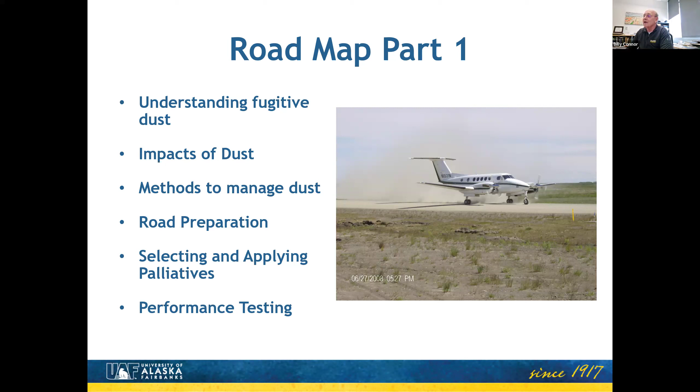The dust is coming off of our roadways, and in this case, the photo airports, the impacts of those dust, how they affect our daily lives, how we manage our roads in order to minimize the dust, as well as selecting the right palliatives and how we apply them, and then talk a little bit about some of the tests that we have available to test the performance of our palliatives before we even put them on the roadway, so that you can get an idea of some of the resources that are available to you.

Right now, throughout the U.S., there's 1.3 million miles of unpaved road. 97%, as you might guess, are in the rural areas. And the data that we've collected over the years indicate that there's about 10.5 million tons of particulate matter, PM10, as we know it, to 10 micron size, being put into the air on an annual basis. So that's a lot of material that's kind of floating around in our air and impacting our daily lives.

To bring it home a little bit, consider a 2-mile unpaved road, which is not uncommon for many of our communities around the state. 20 vehicles a day at an average speed of 30 miles an hour. If we do that, we're putting about 5 tons of dust per month into the air, and that's getting into our lungs, getting into our houses, and just wreaking a bit of havoc. So that kind of gives you the magnitude of that, and the photo that you see there kind of gives you a sense of it.

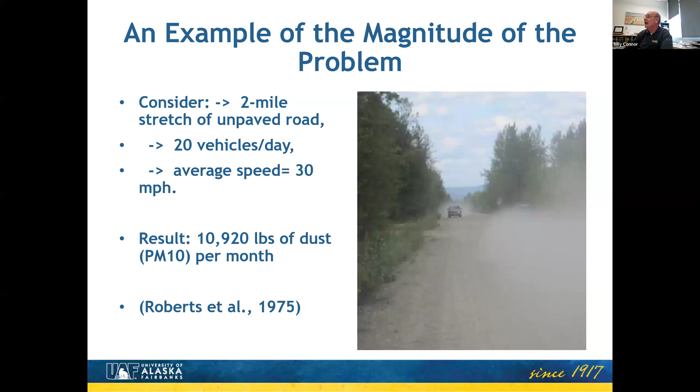It's interesting to note that an ATV puts about the same amount of dust as that pickup that's coming at us or going away from us each time. We'll see some photos of that, but just kind of think of an ATV instead of a pickup there, and you'll see about the same amount of dust being thrown into the air.

It does have an impact: degradation of the road surface, and we'll talk a little bit about how that manifests. Driver safety, primarily due to the washboarding and to the visibility, and then the health and quality of our life, and especially the elderly and the young are really affected by that quite a bit. Just to make sure we're all speaking the same language in all of this, I'll give you some definitions, and we'll give you a few more as we go along.

The surface course is the top layer of the road that is being driven on. And that can be anywhere from silt. Some of you have dirt roads out there, all the way to gravel roads, chip seals, and even pavement. So the surface is what's on top, basically.

Aggregate is a mixture of rock and sands and silts that make up the road surface. Fines, that's that fine material that makes up the dust, if you will. And we actually can use that to our advantage, and we'll talk about that a little bit in there.

Plasticity, that's kind of what makes everything stick together in there. Most time we think about clay, but even some of the silts have a stickiness to it, if you will, and we call that the plasticity of the soil. And we actually want some of that in our soils to make it dust free.

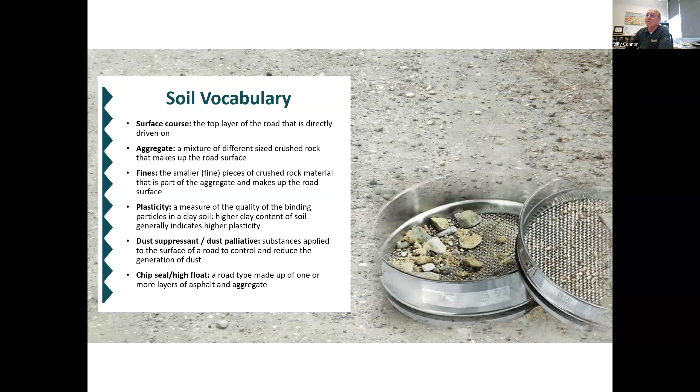A dust suppressant or dust palliative, we use those interchangeably, is the substances that we apply to our surface to reduce the dust, the generation of dust. And then chip seals or high floats, that's a type of road that's made up of one or more layers of asphalt and aggregate. And of course, we all know what a hot mix pavement is, and we'll talk about chip seals and high floats and those types of materials in part two.

Okay, a few more definitions. Loftable material, that's material that can be placed in the air due to wind or vehicles going by. That's usually the 0.75 mm material and finer. And you can see that in the photo off the Dalton Highway here. As a vehicle, actually there's two vehicles going by there. If you look carefully, you'll see a bus going north. But at any rate, we can see that.

Suspended material is one that stays in the air for an extended period of time, and that's usually the PM30 and smaller. The smaller it gets, the longer it stays in the air, and we'll talk about that. And then those materials that are harmful to the health, those are smaller than PM10. Sometimes you hear about PM2.5. Those are the materials that actually get into the lungs and cause damage to us. And we'll talk a little bit more detail about that.

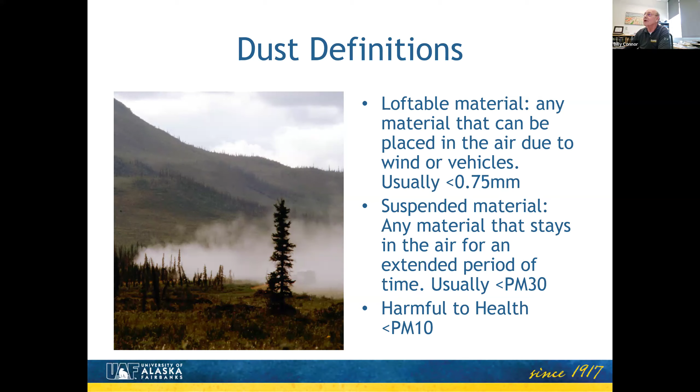So looking at that, we can define the dust in a few different ways. We're going to talk about the heavy dust. That's the material that is fairly large in size, and that usually falls out of the air very rapidly, within a few seconds, 3 to 4 seconds. And then there's the settling dust that usually falls out of the air within about 30 seconds.

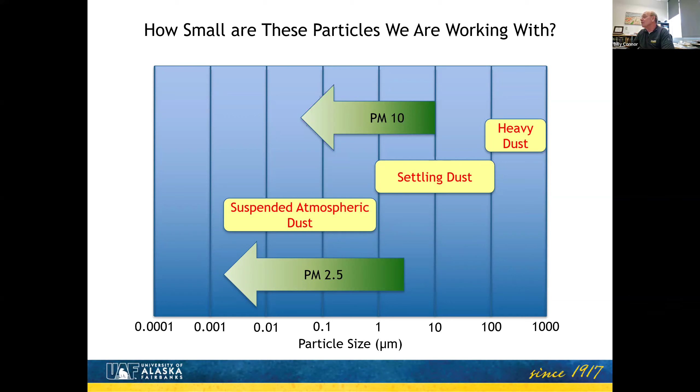And then there's that suspended in the air, which is kind of in the PM2.5 range. That can stay in the air for days. And in fact, at times if you look in the air, you can see haze forming. Some of that is due to fog or water, but some of that is due to the fine materials in there as well. And that can stay, as I say, in the air for days. And we actually get a fair amount of dust through that transport all the way over from Russia.

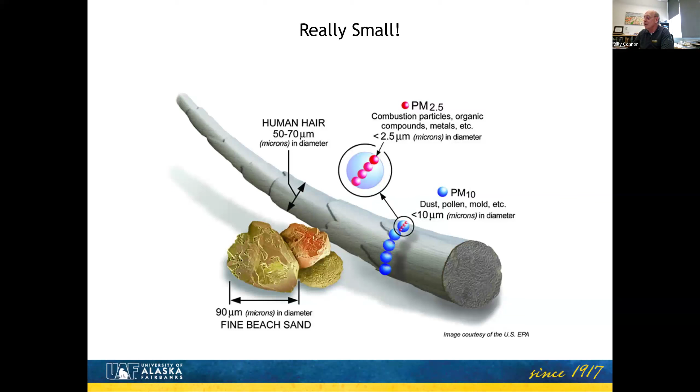To kind of put it in perspective, we've got 50 microns, the size of a human hair. Unfortunately, I don't have much of that, so I can't really tell you what it's like. But PM10 is about one fifth of the size of a hair. And if you look at PM2.5, it's a quarter of the size of PM10, which would be about 1/20 of the size of a human hair. So we're talking about some pretty fine material.

As far as the health issues, as I said, it impacts children and elderly most likely, due to emphysema and the sensitivity of young folks' lungs in taking that up. There's been some studies by the World Bank that indicate that the mortality rate actually goes up somewhere between 4 and 10%, depending on the base health of the community, for 10 micrograms per meter cubed, which we can get. The photo was showing much higher than that. So we can actually see the mortality rate going up a little bit due to dust.

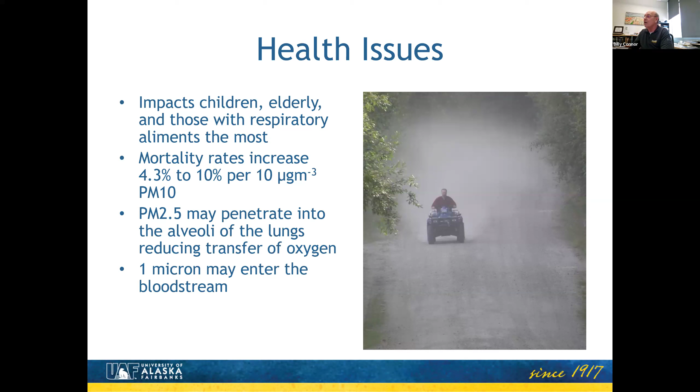It also gets in the alveoli of the lungs, reducing the transfer of oxygen. That's where the emphysema comes into play. And if you get the materials that are 1 micron or smaller, it actually can enter the bloodstream. And in some of the studies that we've done with the equipment we've got here at the university, there is some of that material in the air that's coming off our roadways as well.

One of the things we really need to pay attention to when we're talking about dust suppression is prioritizing where we're going to use it. In most cases, you can't afford to eliminate the dust in your community, so we want to put it where it's going to be most effective.

That's generally where the use is highest, where the traffic is highest, and people are going. But we also want to pay attention to areas where people tend to congregate, like the school, the community store, clinics, those kinds of places, especially where we have young and elderly congregating.

We need to prioritize areas outside homes where people live with respiratory issues. There are maybe some areas that are environmentally sensitive in or near your community, perhaps fish passage, or where you pick your berries. And then roads near subsistence and food preparation areas.

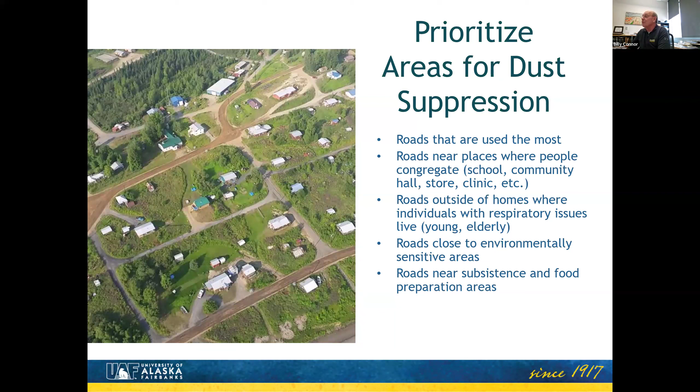So looking at this, I'm sure you've all seen this in the communities as you drive around. Let's talk a little bit about how that forms.

When a vehicle goes by, you're getting shear from the tires, which kicks up some of the dust. If you carefully watch when a vehicle's going by, you'll see that happening. Then coming off the back of the vehicle, we get what we call turbulent shear, where the air is mixing very rapidly and just picks it up. As the vehicle goes by, that shear will likely pick dust up off the surface and kick it into the air. We call that a roll-up flow.

And then as the vehicle goes by, there's some vortices created in the air. The air is still moving and swirling around back there, which holds it up. If you look in the front of that van, you can see another vehicle goes by, and that really fine material can be carried for miles away from the roadway and stays in the air for a long, long time.

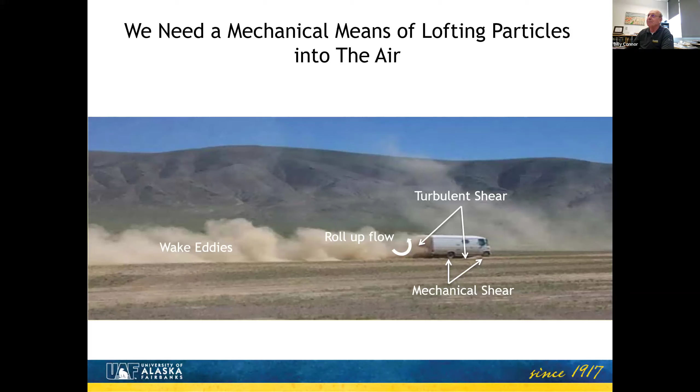The movement of dust has several parts. There's mechanical and convective air lofting — just the heat of the air can hold dust in the air and move it up once it's lofted. So on a very hot day, you'll probably notice the dust goes much higher behind vehicles than it would in cooler areas. That's the convective lofting.

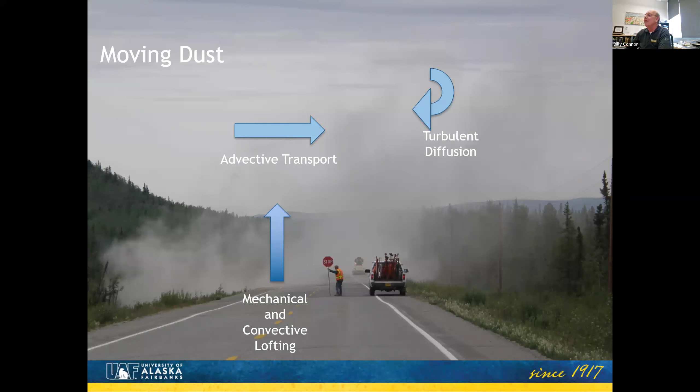And then there's advective movement, just movement of the dust as a result of air or wind movement, moving it in the direction of the wind. Oftentimes there's also some turbulent flow going on that swirls around and holds it up in the air. You've seen that sometimes in plumes of smoke — look at the stack during wintertime coming out of your furnace, and you'll see some of that turbulent flow. And then finally it settles out.

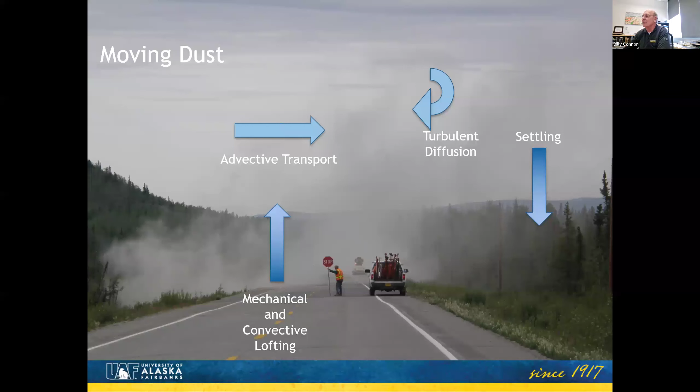So you can have a number of different things going on that help hold it up, or not. It's not horribly important that you fully understand all of this, but it's kind of nice to know what's going on and why the dust is going the direction it is.

I'm going to push the button here in a minute to give you a sense of this. These are actually to scale for the particles, all the way from 0.1 millimeter down to 0.001. The 0.1 millimeter stays in the air about 3 seconds — it comes out very rapidly. You can see that behind the ATVs as they go by; that dust just kind of falls right out.

But some of them, the 0.1 micron stuff that I said can get into the bloodstream, can stay in the air for 6 hours or more, so it can be transported a long, long way. And if there's any of that turbulent flow we just talked about, it can hold it up in the air for days or even weeks as the airflow gets it high enough. We can see dust up at the 10,000-plus foot level at times, just due to all of that.

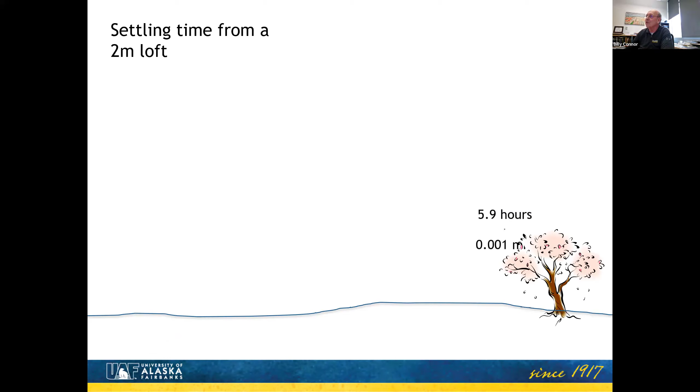So if you watch this, you can get a sense of how rapidly those particles fall in relation to each other. As I say, it's all to scale, but I don't want to wait 6 hours to let you watch that particle fall. So it gives you some sense of how that comes about.

Okay, so let's talk a little bit about methods that we can use to manage dust. We generally want to start with the cheapest first. But at the same time, it turns out that the best dust management programs really start with the roadway itself. We want to make sure that we put the road together in such a way that we minimize the dust that's being picked up off of it. And there's a number of things we do.

But before we get started, some more definitions for you. The traveled way is the area which the vehicles travel on or people walk. And then there's the shoulder, which is just off of the edge of the traveled way. Sometimes we don't have much of a shoulder; in other cases, we do have a lot of shoulder.

The foreslope is a slope on the front, at the edge of the embankment. And then sometimes we have a ditch, sometimes we don't. It's always a good idea to have good drainage - we can talk about that. And then we have a crown, and that's the difference between the center line and the edge of the road. We need some of that going on there.

And then we have the back slopes there, which is the back of our ditch. And then the right of way is the portion of the roadway that's a portion of the land dedicated to our roadway network.

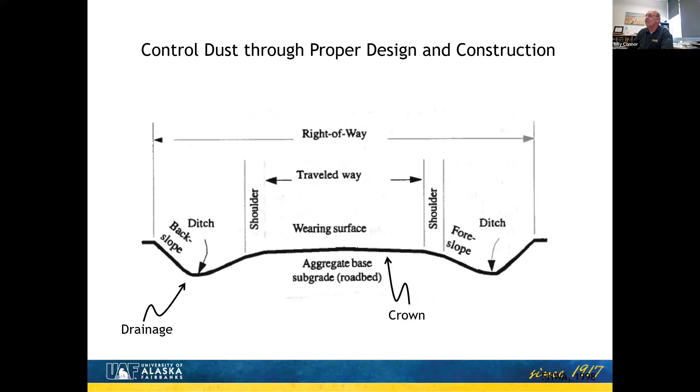So this is something that we put together a few years ago, which has been, I think, fairly helpful for people. And this is suggested dust management approaches that we have. This is not cast very rigidly, but it gives you a range or a sense of ideas of what you might be looking at.

If you've just got a few days, 12 to 20 days a year between May and September that have dust or are dusty, you may want to consider institutional controls such as changing drivers' behavior, speed limits, those kinds of things. That also applies if you look at road uses less than about 25 vehicles per day. If you're down in that range, it's going to be more effective for you just to simply try to keep people slowed down and use those kinds of institutional controls.

If you get up between 21 and 30 or so, we probably want to start institutional control plus water. Water is a very good dust palliative or dust suppressant. It just doesn't last as long as some of the others do, and we'll talk about that in just a bit - for a range of about 25 to 75 vehicles per day.

Once you start getting up to 30 to 50, you probably want to start adding some chemical stabilization or palliatives in there - we'll talk about what those look like. And that gives us a range of about 75 to 500 vehicles per day. The range is getting a little bigger here.

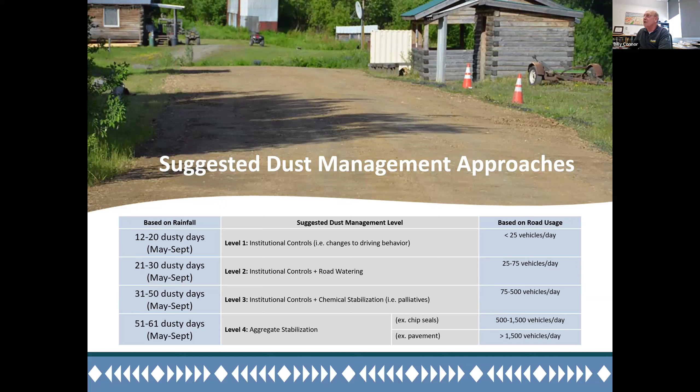Fines, remember that's the minus 0.075, or the 200 sieve, going in there. We want that to be up in the range of 8 to 15% for untreated roads. In fact, we want that up there for treated palliatives as well.

And it probably sounds a little bit counterintuitive to add dust in order to reduce dust. It's because that dust being put in there acts as a binder, if you will, holding the coarser aggregate together and reducing that dust. And it does work. I can attest to that, having done that a number of times. Adding a little bit of fines will help that.

All the specifications for surface courses for unpaved roads will give you the fines content somewhere in that range. They'll vary a few percent one way or the other. I know Alaska DOT really likes it more in the 10 to 16 or 18% fines for their purposes, a much higher volume, but that's the kind of range you want to go.

So if we look at this in a little bit different terms, think of the shrinkage product as the plasticity index, which gives you a sense of the stickiness. The more sticky that it gets, the better it's going to bind together. And then the grading coefficient is the amount of fines in relationship to the coarse aggregate in there. I'll show you a little graphics of what that means.

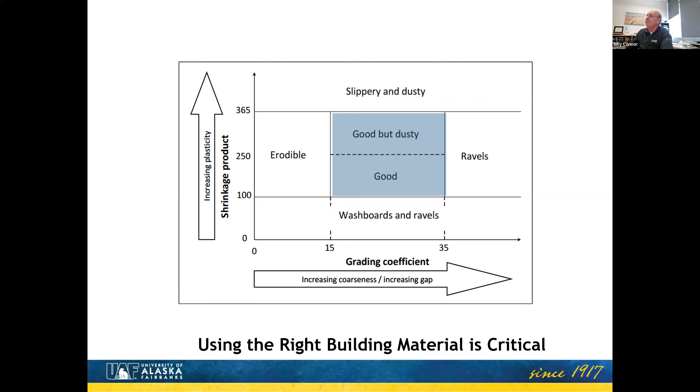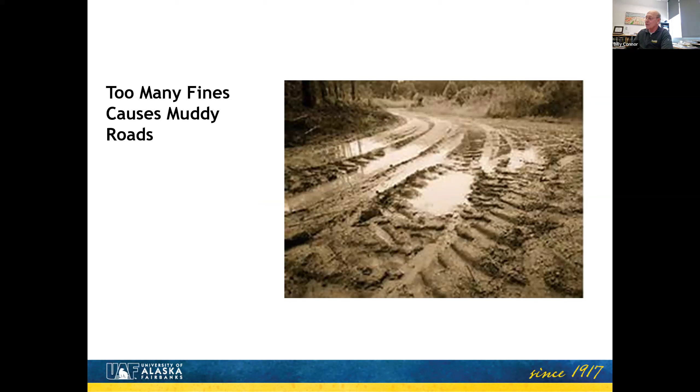Here's a situation where there were too many fines, and I'm sure we've all seen this, where you get muddy areas, fine areas, and then when that dries out, it just turns to a dusty mess, and even walking through it casts up a lot of dust going through there.

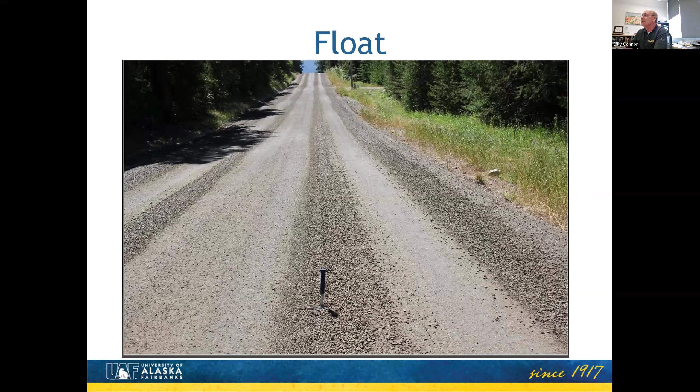If you don't have enough fines, we end up with something that looks like this. And so if you see something like that, you're pretty well assured that you don't have enough fines. We call that aggregate float, and that just gets cast off to the side. Unless you find a way to put the fines back into that, you're just going to lose that material.

This is kind of an interesting photo. It's here in town in Fairbanks, one of our local roads. You can see the float there. That indicates there's not enough fines.

You also see the washboarding going on there, and that has to do with the frequency of the tires as they bounce along the road. It's a function of the speed as well as the suspension characteristics of the vehicle. And if you look over there, oftentimes off to the side, you'll see a layer of fine, loose fines. When people drive over there, you really get a lot of fines being cast out.

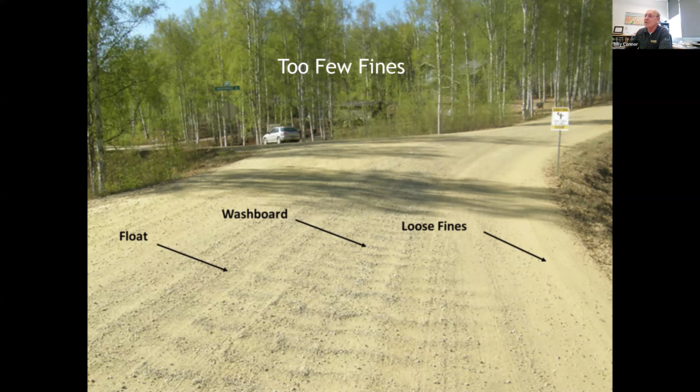And when you have that situation, you're losing your aggregate. So it's not only costing you in the way of health effects, it's also material that's being thrown away and cast off to the side, and you're going to have to replace it at a fairly significant cost at some point in the future. So let's look at what's going on in there.

That's the good news. But there's not a lot holding it together, and you can't really compact it, and it's going to ravel. You're going to end up with a lot of float in there, and it's just not going to hold together very well. And you're going to get a lot of cracks in your windshields if you got windshields, and if you don't, if you're on a four-wheeler, you can get rocks thrown and they hurt when they hit you.

If you get it right, you're going to maintain that coarse aggregate grain to grain contact, and you're just going to fill the voids.

Those fines help hold it together in a number of ways, especially if you've got a little bit of clay in there. That's the ideal situation. If you get too many fines in there, you start to see those fines separating the aggregate, and it's just kind of floating around in there.

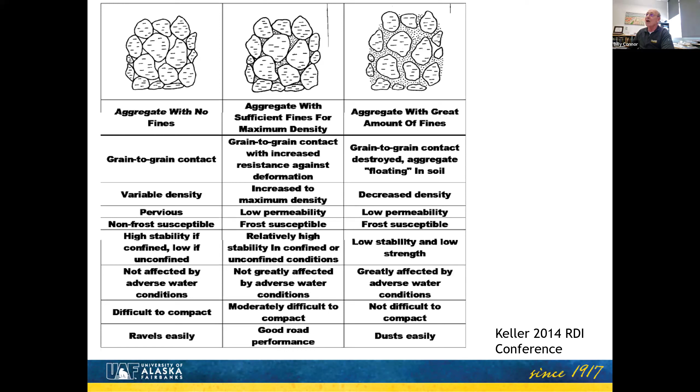We also want to make sure we get a good crown. I know that most of the communities I go out, they either have no crown or they have a belly in the road. I'm not going into the details, but hopefully some of you were at our gravel roads workshop about a month ago, where we went into this in great detail over a couple of days. We really want our crown to be between 4 and 5%.

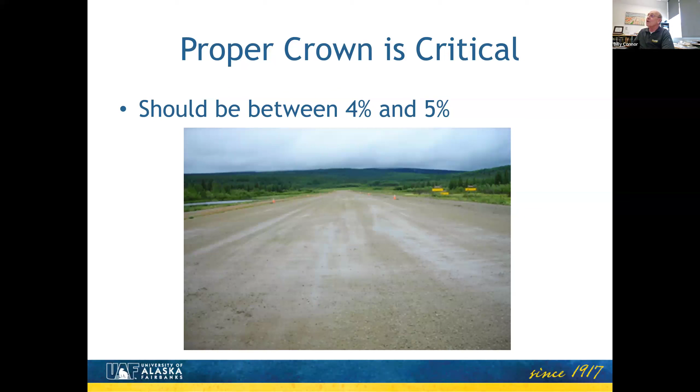If we don't get enough crown in there, we get something like this. You get a lot of ponding and a lot of potholes in your roadway, and that's not a very good situation for you.

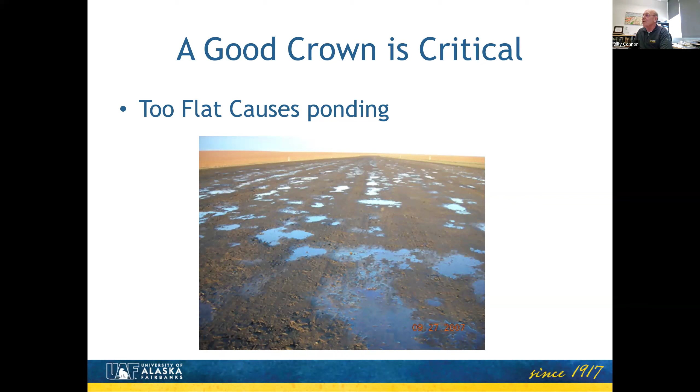It'll also, because the water goes through something called pumping and hydraulic action, actually force the fines out of the soil, and it'll end up on top and just be blown away. So that's what forms the potholes: the tires hit those potholes and force the water out from under them, and when they do so, they take the fines with it.

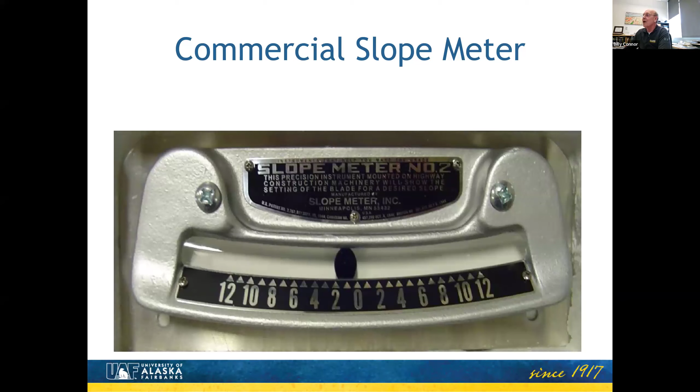Just make sure when you put it on, it's on a nice flat surface so you know what the slope is and you put it in the right configuration. These things are about $300. They're not very expensive, but they are a great tool. I like to put it on the grader so the grader operator knows what they've got as they're grading, and there's no question about what they have.

Another tool is to simply cut yourself a batter board, about 1/2 to 3/4 of an inch per foot, and lay that on the roadway. What some people do is take a 2x6, put a level on it, and lift one end by the amount shown here, using that as a homemade slope gauge. It's a fairly inexpensive way to do it, and you can generally do it with materials you have on hand.

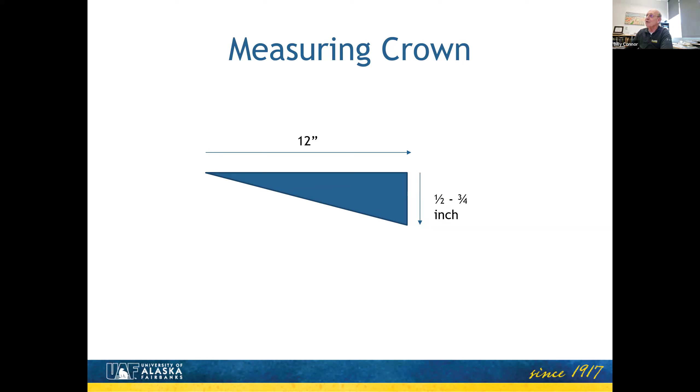The other thing you want to do is take a string line and string line your blade once in a while to make sure it's nice and straight, not convex or concave. Usually you end up with a belly in there, creating a quarter crown in the middle of the area, which you really don't want. You want it to be nice and flat.

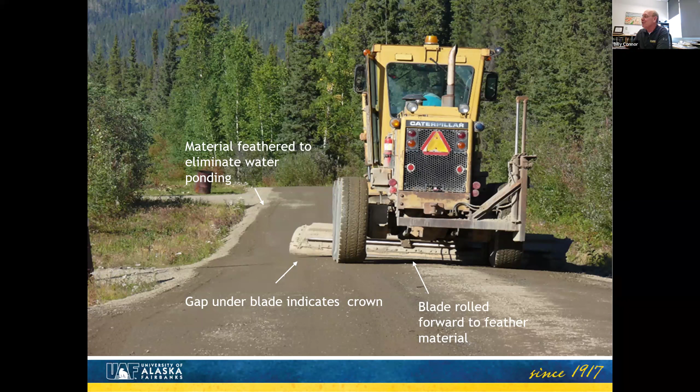I'm not going to go into great detail about how to operate your grader. We can do that at some other point, and maybe Vicky will reschedule the gravel roads session in the not too distant future, so a few more of you can attend that.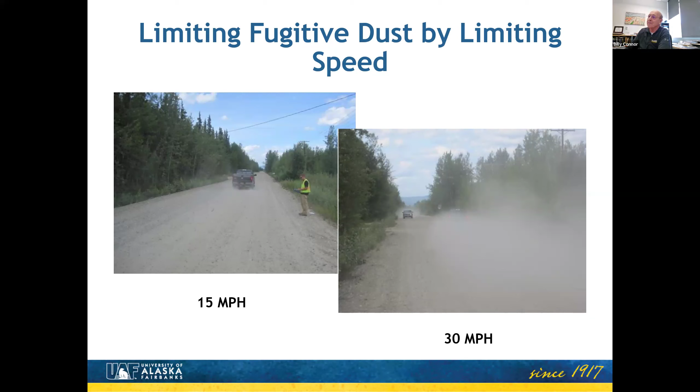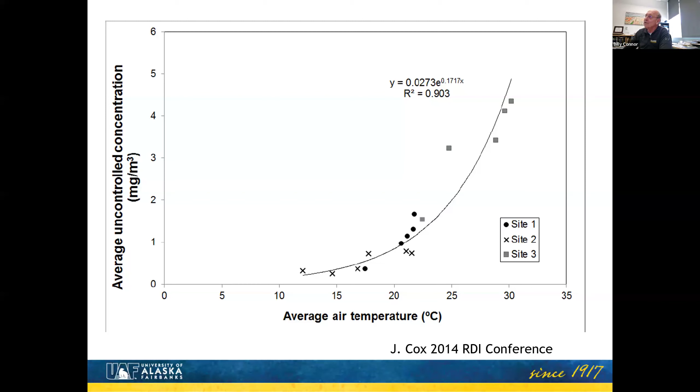If you look at the air temperature, the warmer and drier the air is, the more dust you're going to get. This shows on the left-hand side the amount of dust. Don't worry about the numbers too much, just look at the shape of the curve relative to air temperature. As it gets warmer, you're putting more and more dust into the air, so you probably want to slow people down more in the hotter, drier periods than in the cooler, wetter times of year. That gives you some idea of what's going on.

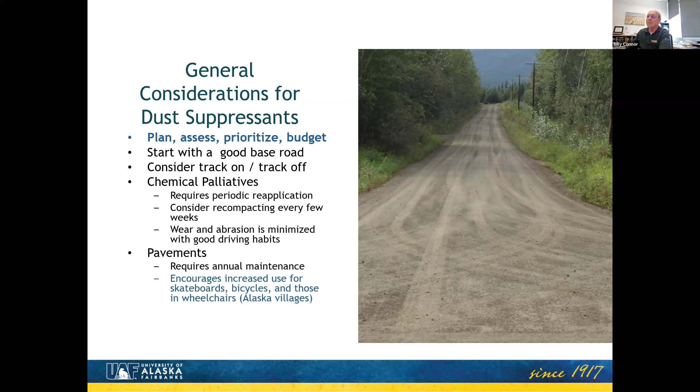Some things to be concerned about. Some of these materials will actually get cast in the air over time because they coat the particles. You can get some runoff, so be aware of that and of which materials can reduce your water quality. And there are a lot of tests that you can have run to take a look at that, and we can talk about that.

The materials that are water soluble tend to move upward in the soil and move to the surface. Salts are some of those, and some of them that are not soluble in water tend to leach downward. The synthetic fluids and the asphalts are some of those materials that tend to move downward into the soil over time.

As we say, there are some things that we need to pay attention to. One is where you're slowing down or speeding up. Those are high shear areas, which cause damage to your palliatives and abrade the surface and loosen it. These are areas where you either want to apply more frequently or compact more frequently. And then we talked a little bit about track on. So we recommend that on the untreated streets you actually treat a portion of it. 25 to 50 feet from the intersection is a good rule of thumb for that purpose.

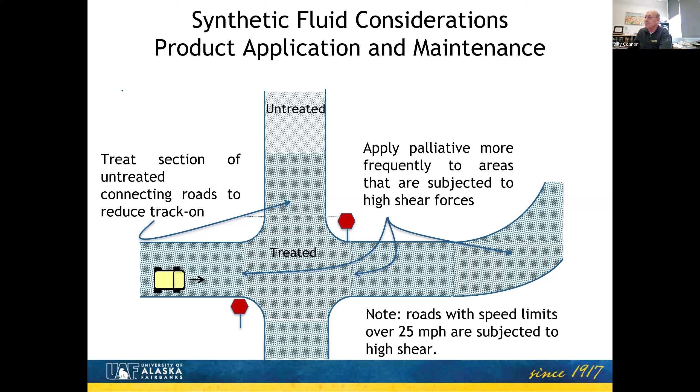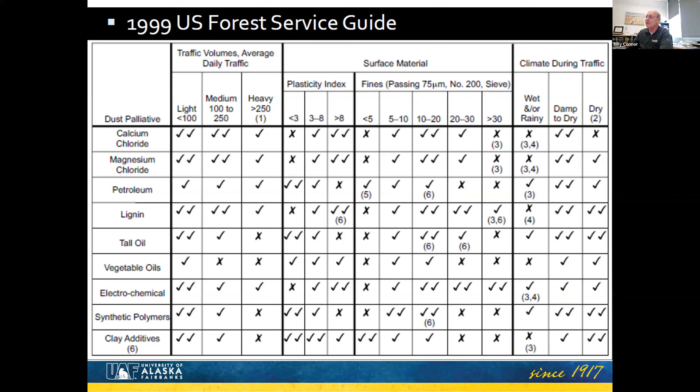Okay, there's a Forest Service guide that's out there. I think we can have a link to that. If we don't, Vicky, maybe we can put a link to the Forest Service guide that gives you some ideas of when to use it and when it's most effective. It's a bit dated, but at least for the class of palliatives you're looking at, it can give you some idea of which ones are most effective.

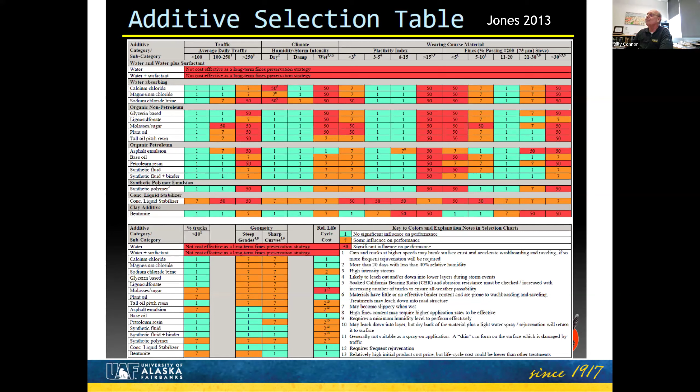There's a new one out by Dave Jones, who is at the University of California, Davis. He developed a newer system, and I'm not going to go over this in any detail, but just know that it's out there, and I'll be happy to work with you if you want to look at some of these. Basically, you pick numbers out of here and put them into a matrix like this, and it will give you some idea of which palliative is going to work best for you. He does have an app on his website, and I'll try to look that up and put that on our website as well, so you have access to that.

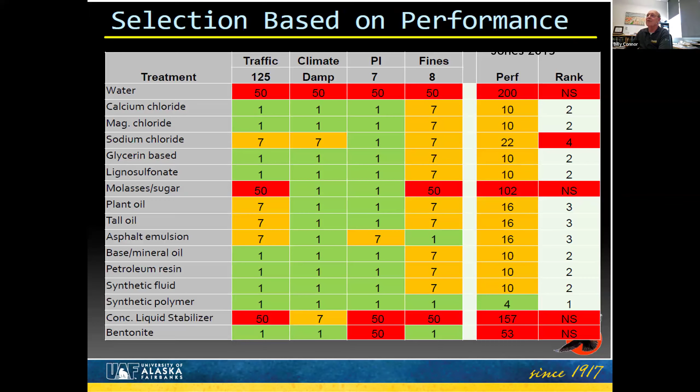Water attracting salts, the salts that we've talked about. We like to use calcium chloride, much similar to sodium chloride that we're all used to, but it's quite a bit stronger. If you've ever tasted calcium chloride, you're not going to forget it. It's very bitter tasting. Sodium chloride on our tables, they actually coat that in sugar so that it doesn't taste so bitter. But we also use it in de-icing and anti-icing as well as a dust palliative.

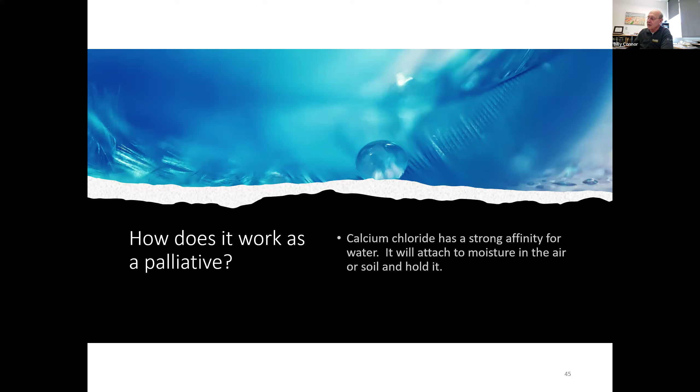Basically, it has a strong affinity to water. If you set it out on the table in a humid area, it's going to grab water and become wet as a result. And we're using that to our advantage in the soil. It's attracting water into the soil, and that helps hold it together. Remember that plasticity index we were talking about? That's a function of water, so we want to keep water in the soil, and that helps hold it together. It also coats the fines and keeps the dust down. It's just basically holding all that together.

It's the one that's used in Alaska most commonly. A lot of the villages are starting to move more and more to calcium chloride. It's very easy to put down, and it also works really well. It does require fines content, somewhere between 10 and 14. If you don't have enough fines in there, it's not going to work very well for you. And if you put too many fines in there, when it gets wet or rains, it's going to become slick and sticky, and it's going to get tracked around quite a bit.

If you're in an area that has a relative humidity below about 35%, it's not going to work very well. So really, in the late fall, when you're starting to get into freeze up, I know Nome has had a real problem with calcium chloride, because in the wintertime before the snow falls and gets a snow cake on it, the relative humidity drops below about 35%, and they start getting a lot of dust as a result. That's just something you've got to be aware of. And if it's a problem for you, we might want to look at something else.

And as I mentioned, it can be slippery, especially with high fines content. It has a bitter taste. It's a mucus irritant. Your eyes and your nose are going to burn if you breathe it. It's not a long-term health issue, but it is going to be a bit unpleasant for a period of time after you have been exposed to it.

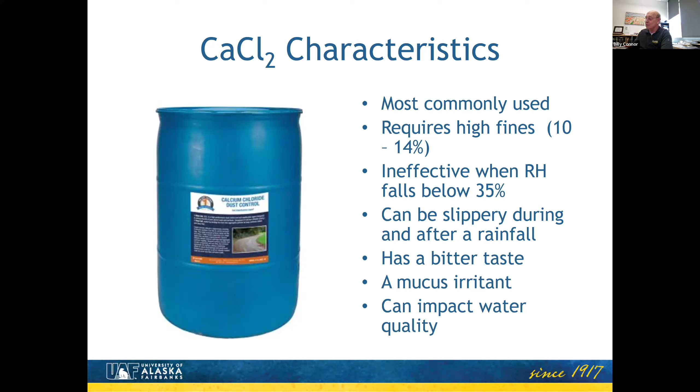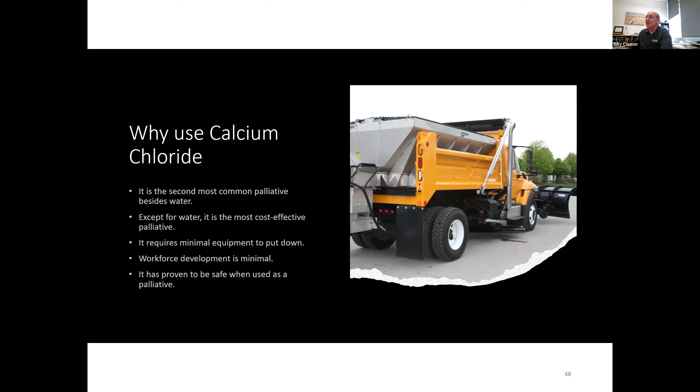We'll talk about that in quite a bit more detail. And if you've used too much of it and it gets washed off into water bodies adjacent to your roadway, it can cause water quality issues. We use it because it is most cost-effective. It requires minimal equipment, and the workforce development is easy to do. So that's the reason we tend to use it.

It is the second most commonly used, and it's very cost effective. I know DOT is paying about $7,000 a lane mile to put it down, versus synthetic fluids, which the last time I looked was about $20,000 a lane mile to put down. And it takes a little bit more equipment.

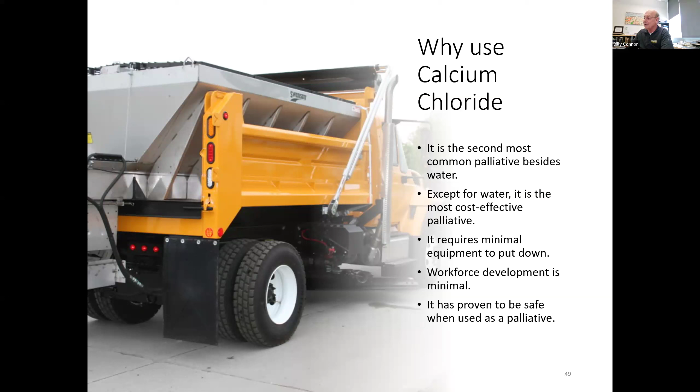You want to make sure you define your project limits, and this really applies to all of our palliatives, establish your drainage, and make sure that you can get the water off. If we need to, we refresh our surface course, and ideally it should be about 4 inches thick for grading purposes. Establish your line and grade. And if you have silt or clean sand, calcium is not necessarily going to be a good choice for you.

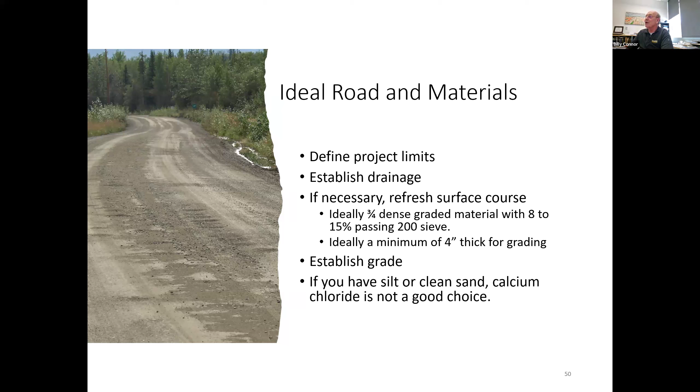We can apply calcium chloride in several different ways. We can topically apply it. Basically, we're going to put it right on the top, within the top couple of inches of the road. We can apply it as liquid or solid, and we can mix it into the soil either in the form of a liquid or solid. If we mix it in, we're going to mix it in the top 3 to 4 inches.

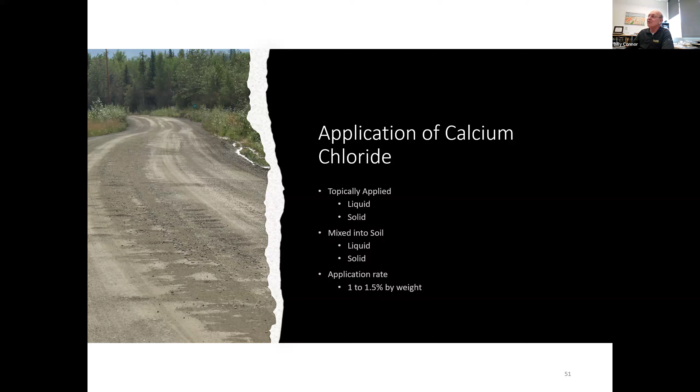But no matter how we're going to use it, we really want it to be 1 to 1.5% by weight in there, and that's not very difficult to calculate. You're going to use that to figure out how much you need to apply, as well as how much you need to order.

Required equipment, pretty minor. If we apply it as a solid, we basically need a grader, some way to spread it, a water truck, and ideally we'd like to have a compactor to compact it when we're done. Not absolutely necessary, but it's to your advantage to do that. If we apply it as a liquid, a little bit different equipment. We're going to need a grader, a water truck, and a compactor is optional.

And depending on how you get it, if you get it in the super sacks, you probably want a forklift so you can lift it up and put it into the truck. Otherwise, you might want to consider ordering it in bags so that you can handle it.

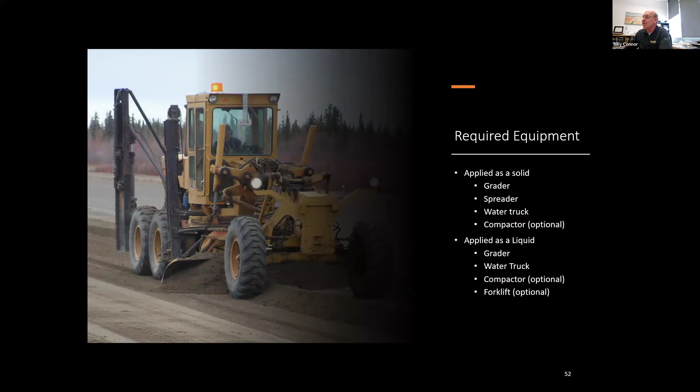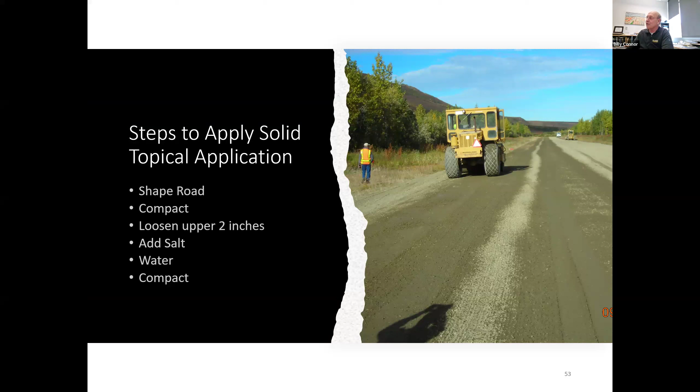Steps to a solid application: we're going to shape the road, then compact it, then loosen the upper 2 inches, add the salt, water, and then recompact. I'm not going into great detail, but that's really all that's involved. You can probably do at least a mile a day with the equipment you have in the villages.

And if you do reapply, you're probably just going to add a little bit to the surface and make it easy. It's going to cost you more in the beginning, but it's probably going to be a little bit cheaper in the long run. So it is a means of doing it, but that's going to be a function of your desires and your budget.

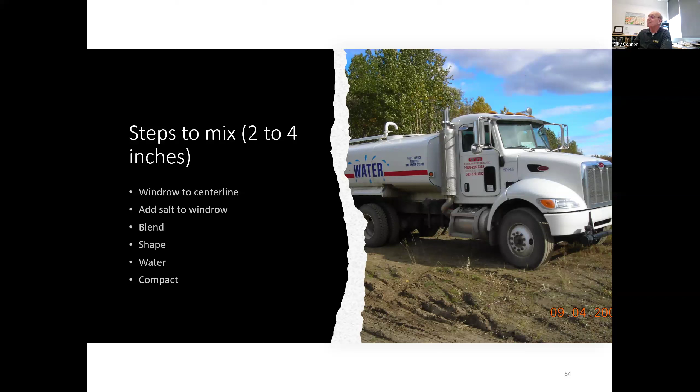If we want to add brine to the surface, and I'll show you some graphics in a moment to show you how much water to salt you need to put in there, it's actually a little bit easier. You're going to shape the road, apply the brine as we see here with this water truck, and then compact that if you've got

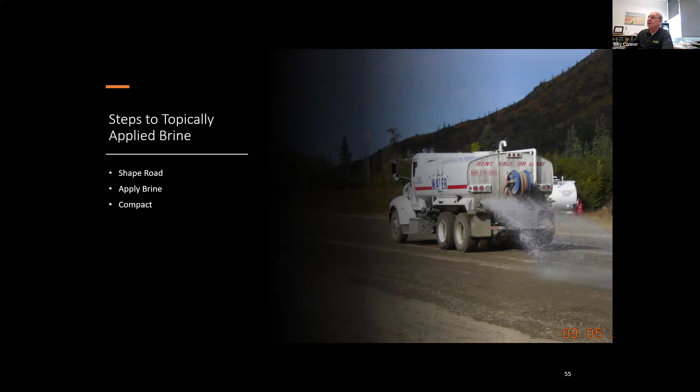compaction equipment. It's actually going to be quite a bit faster for you. If you're going to blend it 2 to 4 inches, we're going to loosen the roadway to depth, apply the brine, blend, shape, and compact.

So it's going to be a little bit more effort, but you can do it that way.

Talking a little bit about worker safety. You want to make sure you've got coveralls for all of your folks, gloves, safety vests, and glasses for them. Calcium chloride is a strong irritant, and you want to protect your workers. Make sure they have plenty of water, because they could breathe in a little bit of that dust, and you want to make sure they stay hydrated and get that washed through their system.

Showers at the end of the work shift, rather than having them go home and try to shower, it's better to have them shower before they leave work and get the salt off of them. That way they don't have to take their clothes home with them and expose their family to that salt.

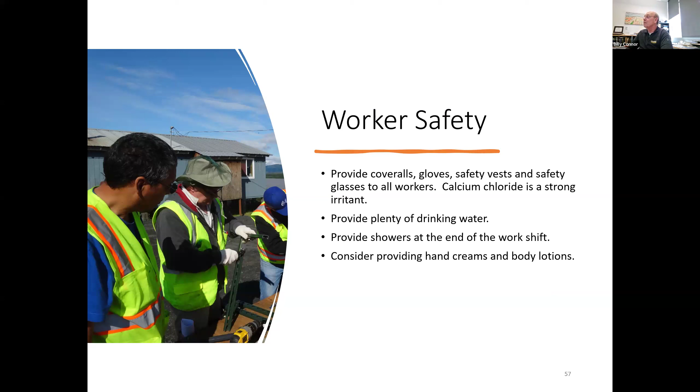Consider providing hand creams and body lotions, so that they can use those at the end of each day to rehydrate their skin.

Equipment care: you want to prevent corrosion by washing the equipment at the end of every shift. Thoroughly wash them, use pressure washers to do that, and take the time to get that cleaned up well. Thoroughly rinse brine tanks, you don't want those rusting out. Some people are going more to plastic brine tanks rather than metal ones because they don't corrode.

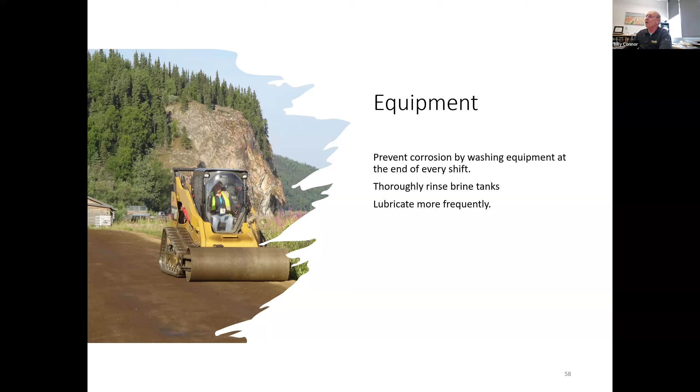And then lubricate your equipment more frequently to keep those lubrication points from corroding. As I said, you want to use about 1.5%. So if you've got a surface course, which generally weighs about 3,500 pounds per cubic yard, that would calculate out to about between 35 and 53 pounds per cubic yard, adding that material.

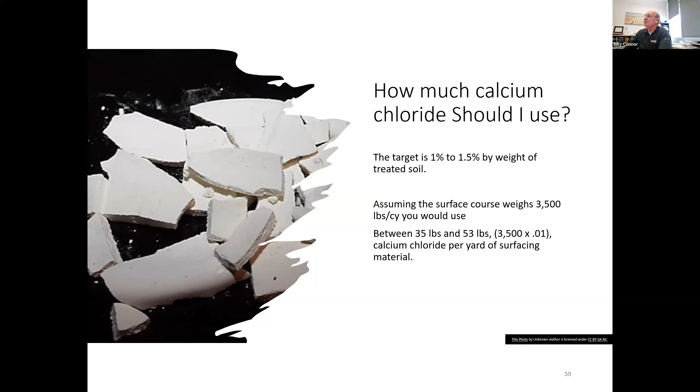So if you simply estimate the number of cubic yards you're going to be treating and use those values, it makes it really easy to calculate. What I've done is given you a table here. There are three ways you can get it: flakes, pellets, or liquid. You can use this table to figure out how much salt you need to treat a square yard of material topically, that's 2 inches deep.

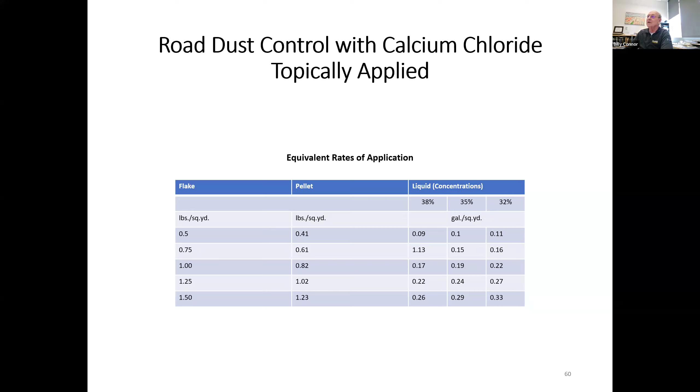And then if you want to mix into a tank, here's a graphic you can use. Just knowing the amount of water in your tank and the amount of calcium chloride, at 97% concentration for pellets and flakes you're going to get 80%, you just go over and pick it up.

So if you want to treat 4,000 gallons of water using flakes, you just go up there to 4,000, go over, and you're just shy of 1,500 gallons of calcium chloride.

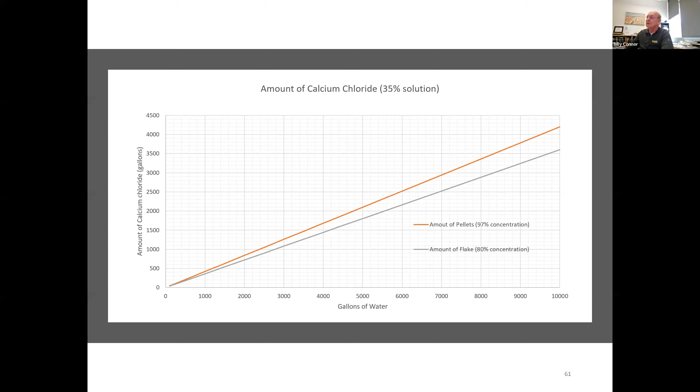Okay, so some parting thoughts on calcium chloride. There are several ways to apply it, choose a way that fits your desires, your equipment, and your workforce best. They're all effective, they all end up with essentially the same result. It's just finding the way that fits the equipment and workforce you have best.

Plan where you're going to apply it in advance, and from there you can focus on the higher traffic areas, the places where people live, as we've talked about before.

Plan early, order early, it takes a while to get here. You may be in a situation where you're ordering here in the next month or two in order to get it on the barge and to get it to your community so that you can store it over the winter to put it down next spring. So look at your logistics and see what fits.

If you do order it and overwinter it, make sure you cover it thoroughly. I suggest at least a double wrap of tarping to keep the snow and water out of that. It's really a pain in the neck to have to go out there with picks and break that stuff up so you can use it. If you need bags, if you can't handle super sacks, grab bags instead, and it works. As I said, keep it dry and protect your people and equipment.

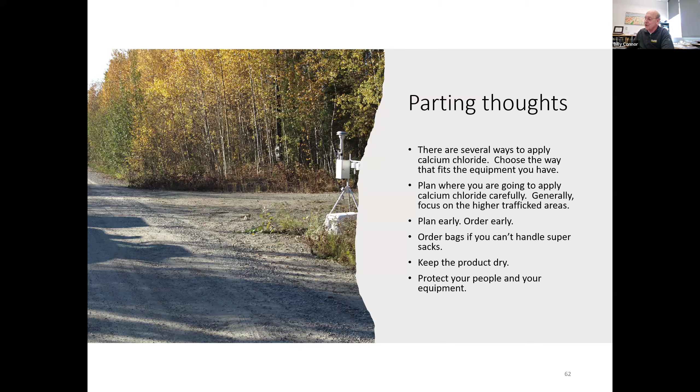Vicky, do we have any questions so far? No, nobody has posted in chat or raised their hand that I can see. And if anyone wants to, go right ahead.

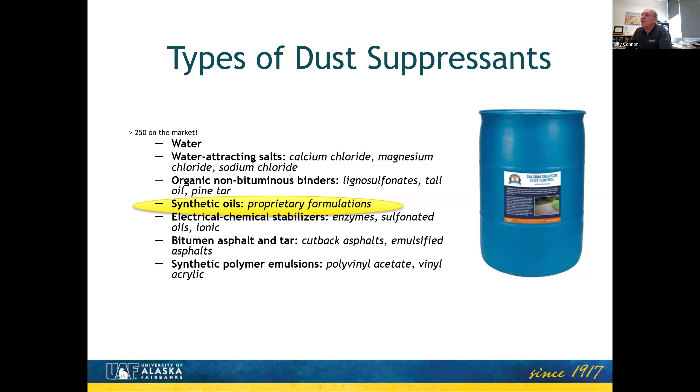Okay, the other popular one being used in Alaska is synthetic fluids or synthetic oils, especially on our airports. Those are generally proprietary formulations, so we'll look at that. It's basically a petroleum product with all the aromatics removed. They do meet all of the EPA and DEC toxicity requirements, so we don't have to worry too much about that.

They're naturally clear unless they have additives. I know Midwest Industrial put tall oil in theirs, which makes it kind of a blackish color. It's not making it any less safe, it's just they've chosen to put something in there. They are non-corrosive, but they're probably 2 to 3 times more expensive than calcium chloride.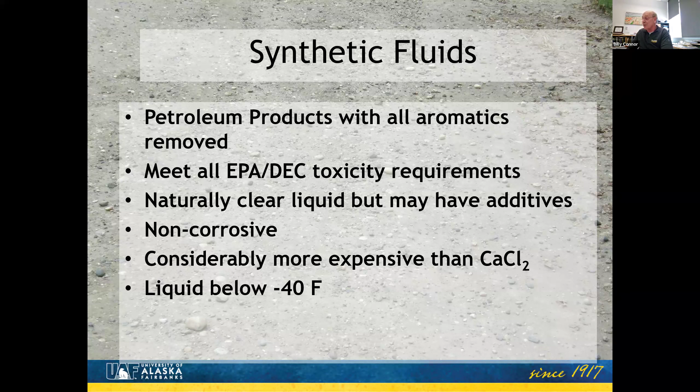But the nice thing about it is you can store them to -40 or -50 and they work just fine as a result of that. You can apply it with some minimal equipment.

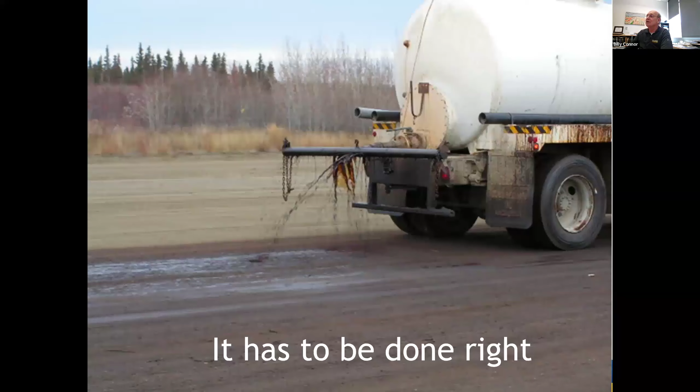Here is in Ruby, where it was applied. We were able to apply it with a very simple pump with a trailer with the tote on it, pulled by an ATV. This one's a 4 by, or a 4 by 6 in there. But you have to do it right. This is not a good thing to do. You're not getting out of this a very good uniform application, it's kind of puddling up.

And this is what that airport looked like when it was put down. The contractor put it down and that did not perform very well at all. In fact, the contractor had to come back and completely reapply the synthetic fluid there.

And then this is another runway. I forgot which community this is in, but they used the system we used in Ruby and were able to get a nice uniform application.

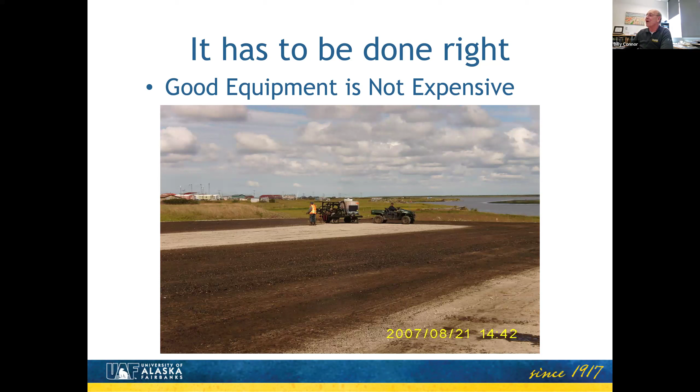You can either build your application system yourself, we can provide you with the materials and the approach if you like, or Polar Supply does sell the whole system for you if you just want to buy it. About 8 years ago it was $12,000. I'm sure it's closer to $20,000 now.

There are several types out there of these synthetic fluids. Make sure that your products have been tested. We can provide you with the test methods for that to make sure to do it. So you really need to do your homework to make sure you've got the right products. Some of them that we have worked with, I can tell you whether they do or don't apply for many of them, so if you ask I'll be happy to provide that.

The application rates, you want to be careful. Too much is wasted expensive product, but if you don't put enough on there, you're going to get poor performance. And so you want to try to get that right.

For synthetic fluids and many of the palliatives, we do have a test method, and I'll show you that in a few minutes, that allows us to test it with your soil before you put it down. And with the system that we have now, we can actually go out and test on site to see how well it's working. This is what it looks like.

We call it the mini dust column. As you can see on the right, we basically put some soil in that little hole at the bottom, and we have air pressure, and we puff that soil up, and we use that dust track sitting off to the right side to measure how much dust is in that column over a period of time, and from that we can make an estimate of performance. On the left-hand side is what it looks like, it's in a rifle case, and we can actually just grab that thing and head out the door and measure the dust that's coming off the road as well.

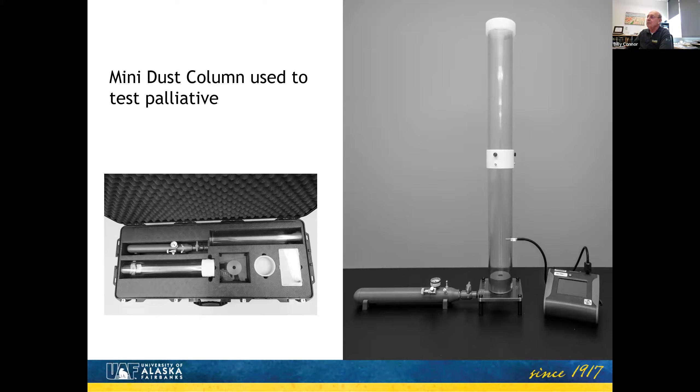This is some of the testing that we've done, and the reason I put this here is to give you some ideas of what ranges synthetic fluids work best. An application rate of between 30 and 40 seems to be right. On the right-hand side is the percent reduction compared to untreated soil. At 30 square feet per gallon, we get about 92% reduction, really good reduction. At 40, we're getting about 85, which is the DOT specification they're using at this point in time. But if you get lower than that, you start getting below what we consider the minimum performance range.

If somebody comes to you with some of these materials and says it works well, I would suggest you call their bluff and say, show me the test, or require that it be tested by the university here. We'll be happy to work with them, they'll pay for it, but we'll make sure those materials work properly. Most of the materials we've seen work reasonably well at 30 to 40 square feet per gallon, but once you get above that, they're not working very well, so I would tend to avoid that.

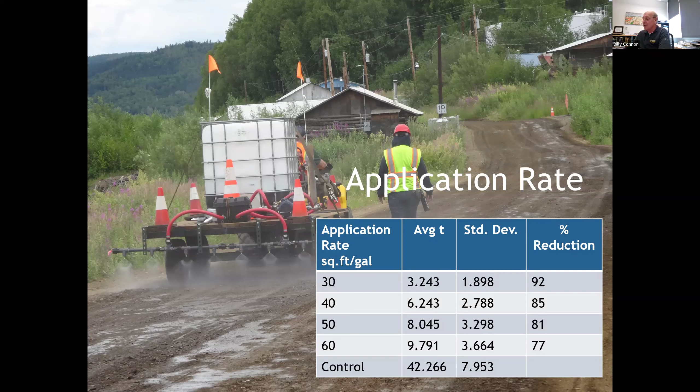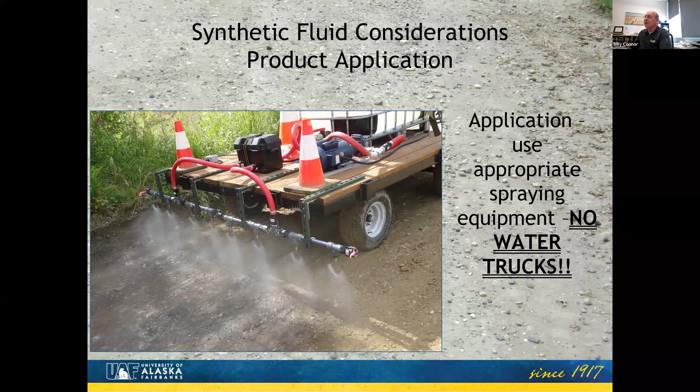For synthetic fluid application, we don't want to use water trucks. We found that spraying it in a fan, like we're showing here, tends to work better. We also found you're usually better off putting it down in two or more passes. If you try to put it down in one pass, it sets on the surface and can run off or be tracked onto your vehicles. So we generally put it down in two sprays and let it soak in between, and that works a lot better for us.

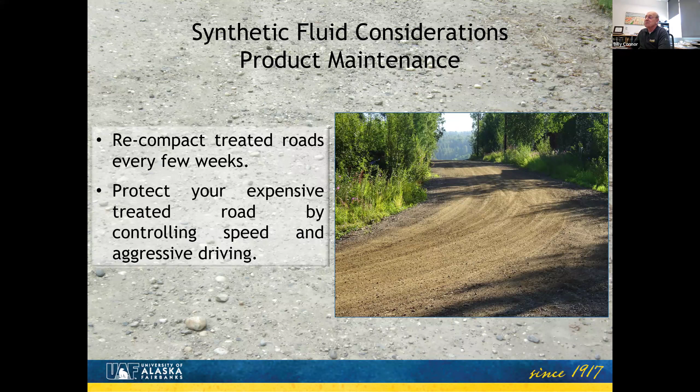Recompact everything and protect it by controlling your speed and aggressive driving, as you're looking at now. Again, the fines content is critical for that.

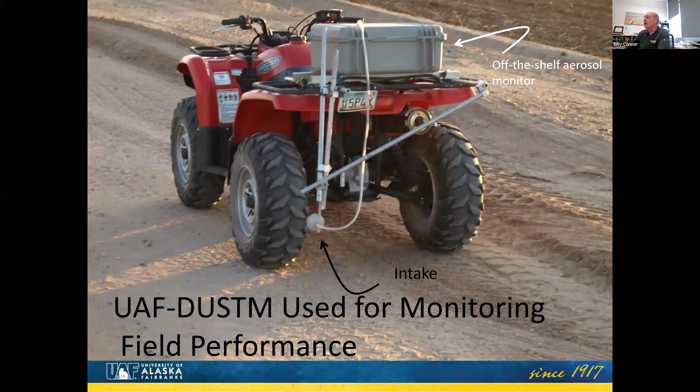This is another device we use to test the roadway or the effectiveness of your palliative on the road. We can also use the dust column we showed before, but basically we're measuring the dust coming off the tire on the ATV. We can come out with that gray box, bolt it to one of the ATVs in the community, drive up and down the road, and measure the dust coming off.

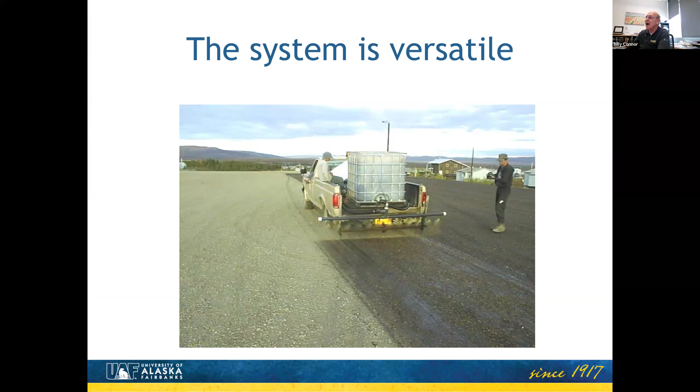As I say, the system is very versatile. We can put it in the back of a pickup, on a flatbed, behind an ATV. There are a large number of ways we can mount it.

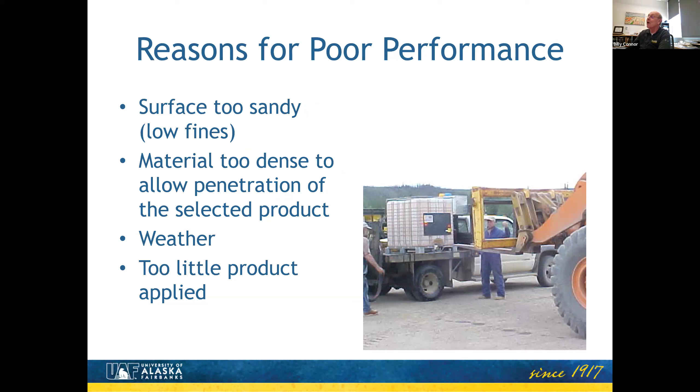Some of the reasons we've had poor performance with synthetic fluid materials is due to low fines content, which doesn't work well. In some cases the material is too dense, so we don't get penetration. We can look at the gradation to determine whether that's going to work. Poor weather is another issue, we've seen rain right after application just wash it off, or we put too little material down.

So we're getting close to the end.